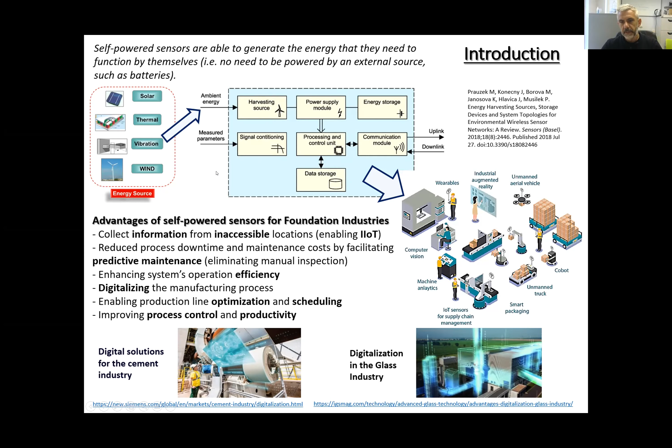Now, I mentioned the energy harvesting device here, which is a key part of this node, because it communicates with the environment to extract the useful amounts of energy that we want. I will concentrate, as I said, on vibration energy harvesting, where there are two main transduction concepts. One, the electromagnetic, where we have the motion of a magnet in the vicinity of a coil with hundreds of turns, and that changes the magnetic field of the coil, and that produces voltage at the end of the coil, which is the energy that we use to power sensors.

Where is the motion coming from? It's coming from the host system, the machinery, for example, that vibrates, and that sets the whole device into motion, and we can retrieve tens of milliwatts of power.

The piezoelectric concept, on the other hand, is less bulky, but it can retrieve smaller amounts of energy, hundreds of microwatts of power, and includes a beam with a tip at its end, which can be set into motion again by the vibration of the host. The beam is dressed with some piezoelectric material, which when it gets deformed, produces voltage that again gives us the useful power.

So both concepts depend on the external excitation, and the aim here is to make the magnetic mass, or this tip mass, operate at conditions of significant vibrations, at resonance conditions. Because the higher the velocity of those two masses, the higher the amount of energy that we can obtain. That can be seen here.

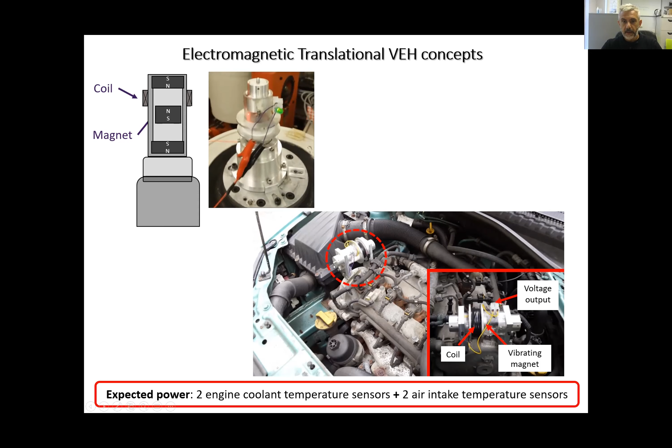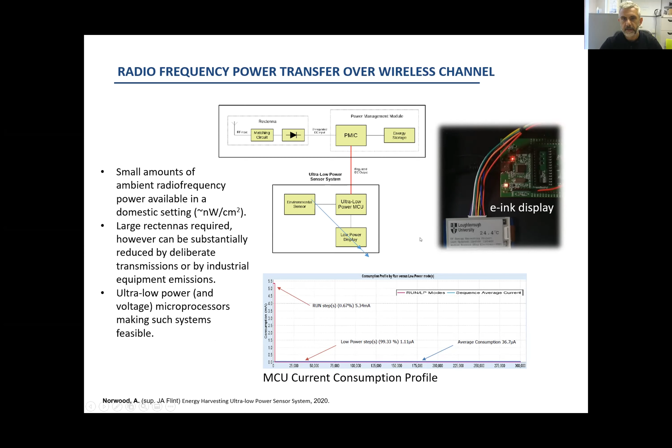Another way of harvesting energy is by using radio frequency power. Usually factories are noisy environments, and industrial processes create considerable radio frequency power that can be harvested using some rectenna—an antenna with a built-in rectifier. In this case, the harvested energy, reaching a peak at 5-point-something milliampere, with the help of a microcontroller, is fed into an e-ink display. So that's a different concept of harvesting energy.

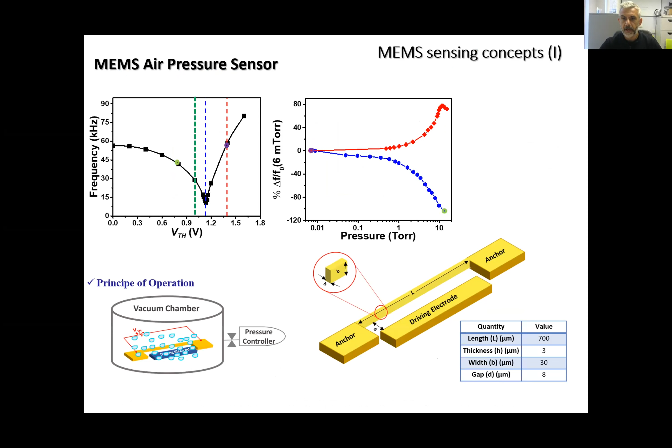In contrast to conventional sensors, which require special coating, MEMS have significantly lower size. Look at the dimensions in the bottom right, in micrometers, while conventional sensors cannot really go that low in terms of size.

The idea is to heat a micro bridge, that MEMS bridge, by establishing voltage between those two anchors, in order to bring this micro beam into buckling conditions so that its lateral stiffness is almost zero.

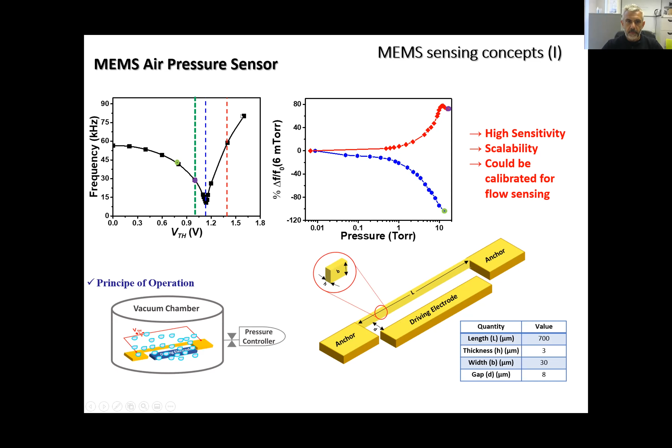You can see here in the frequency graph that the frequency decreases and reaches almost zero at the buckling point. When the air pressure increases, we have a frequency increase, and with appropriate tuning, this is how to determine the size of the pressure.

Finally, the same concept can be used for detecting gas concentration and the particular type of gas with respect to the thermal conductivity of the gas.

The resonator is exposed to gases with higher or lower thermal conductivity compared to nitrogen, and that, as a result, reduces or increases the axial stress in the microbridge, which alters the resonance frequency.

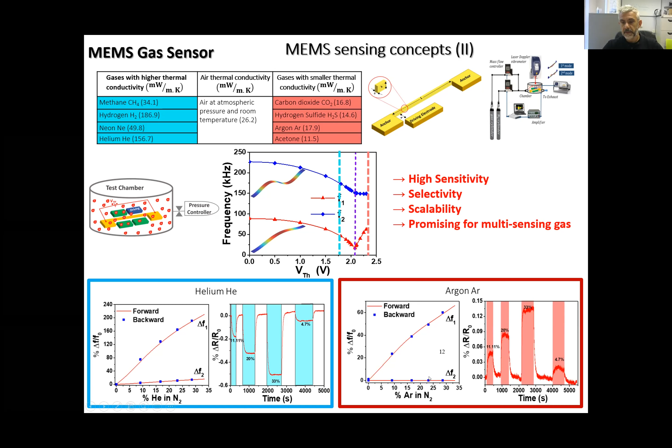I hope I described broadly the idea of how self-powered sensing systems can be designed for a variety of applications and for the foundation industry, where particularly input energy, motion, and vibration are available. Of course, these are bespoke systems, and their design depends on the requirements, the location, the machinery, and where industry needs to retrieve information from.

We will be very pleased to discuss any requirements. Thank you very much for your attention.

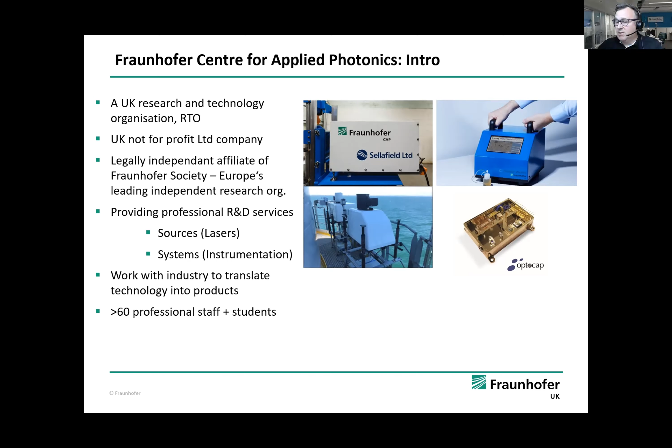So we work with and for industry. We have a mandate to help industry and help UK PLC move on with their technology.

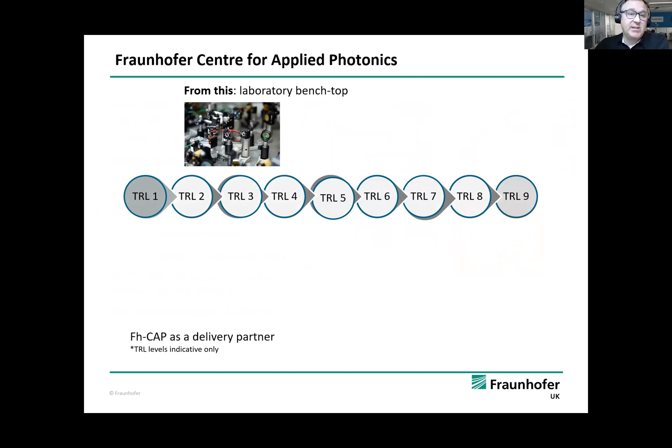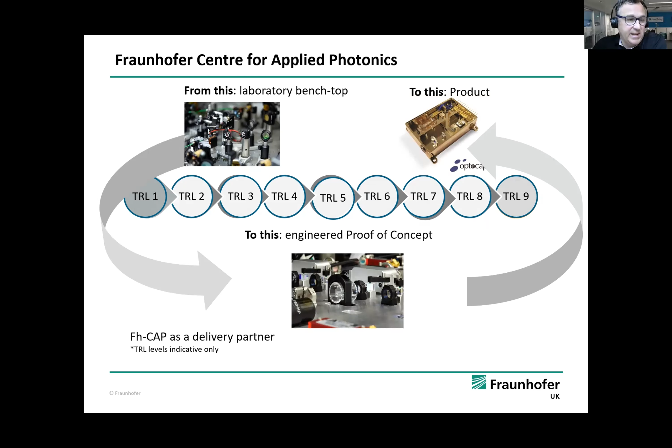If you're familiar with TRL levels, we can take things from laboratory benchtop setups, this classic optical table type thing, and engineer that up to a proof of concept, something that might be portable and manhandleable, and indeed all the way up to product technology with suitable partners. So we span the classic valley of death, as it's often called in terms of technology.

So our capabilities, as mentioned earlier, yes we design lasers, but more importantly, both systems and instrumentation for industry. So as a very brief intro, why photonics? Why might photonics be of use and benefit in some of these circumstances?

Well, it's the ability to sense something without touching it, without taking a sample, without taking it to a laboratory, without doing wet chemistry.

So if that sounds a little bit esoteric, well, if you have an iPhone or many other devices, then you will have a LiDAR scanner. And LiDAR is the optical equivalent, if you like, of radar. So this technology is out there and fairly ubiquitous, it's in your pockets.

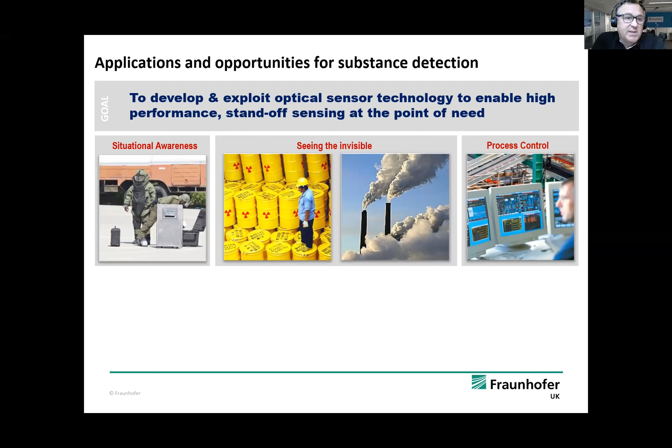So if I can just rattle through a few examples, most of our work, but some of our other people's work, is we have quite a bit of background in substance detection and things like situational awareness in homeland security, but also seeing the invisible, be it in the nuclear sector or industry, and a number of partners we've built up over the years that we've worked with.

That's very simplistic, but bear in mind there are other techniques we can use, fluorescence, Raman spectroscopy, and so on, but I don't have time to give a broad overview of all the different techniques. It's basically applying light to a substance and using the information to gain some insight.

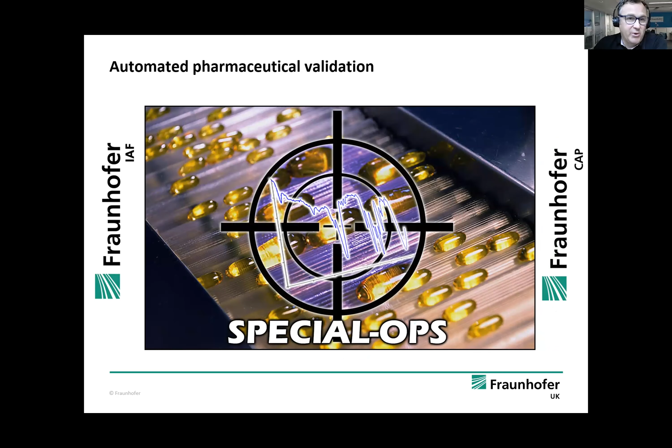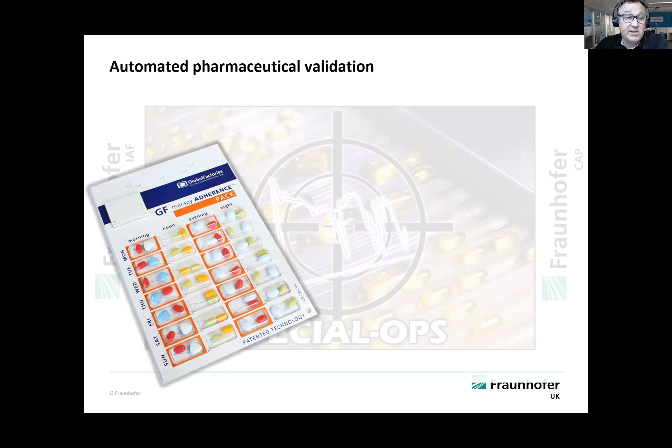So, for example, automated pharmaceutical validation is a project we carried out with one of our sister Fraunhofers in Germany. The idea here is to look at capsules or tablets and verify what they are. The motivation really comes from personalized medicine, where you have your own range of tablets for morning, noon, or night, and there's a demand to make sure you have the right tablets in the right packaging as they've been processed.

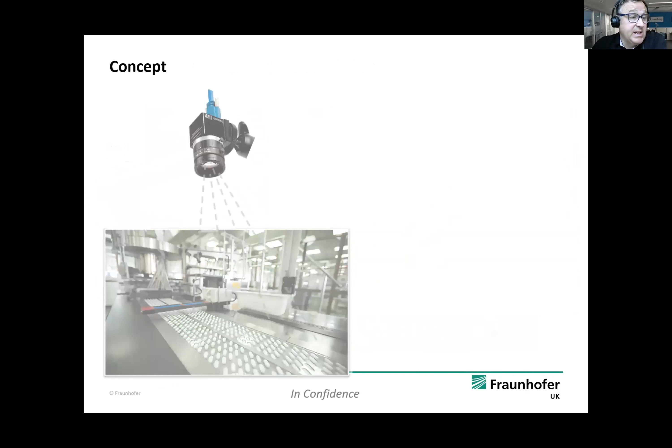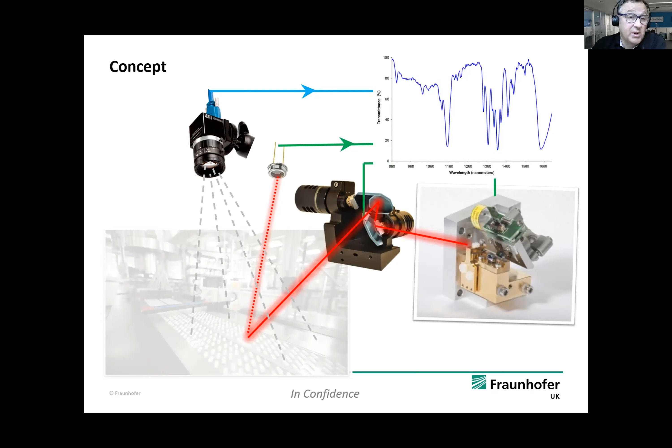So in a brief overview of the concept: you have a production line moving tablets, you have a camera system, and obviously you're going to need electronics to control this overall setup. Use the camera to detect the presence and location of the tablets, use that information to direct a laser at the individual tablets, and then detect the light that comes back. From that, you can ascertain the absorption spectrum and perhaps the actual type of tablet you've looked at.

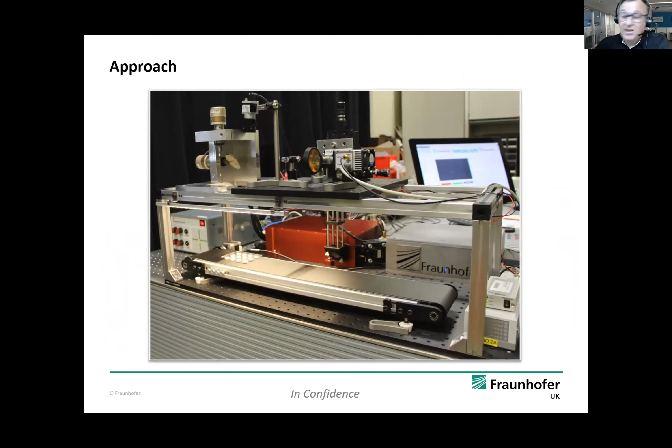So in practice, we put together our own miniature conveyor belt system, shown here with some benchtop systems. And if I can get this video to play.

So what we have is the blister packs with the lid off, sliding past. If you look, you might see a laser beam, there's actually a tracer beam here because this is the mid-infrared wavelength range. You can see a tracer beam directed at each individual tablet. Notice the pack is coming in different orientations, and we're able with the camera system to find where the tablets are. Then we can ask ourselves, what is this tablet? Is it ibuprofen, aspirin, paracetamol, or what have you? We can carry out that analysis and verify which tablet is which. So that gives you an idea.

So, perhaps process monitoring type applications. We're using similar technology in applications on granular material, actually in the nuclear industry for remediation of sites, to determine what is present in material that's presented to the system, perhaps on a conveyor belt. So that's the kind of work we have ongoing at the moment.

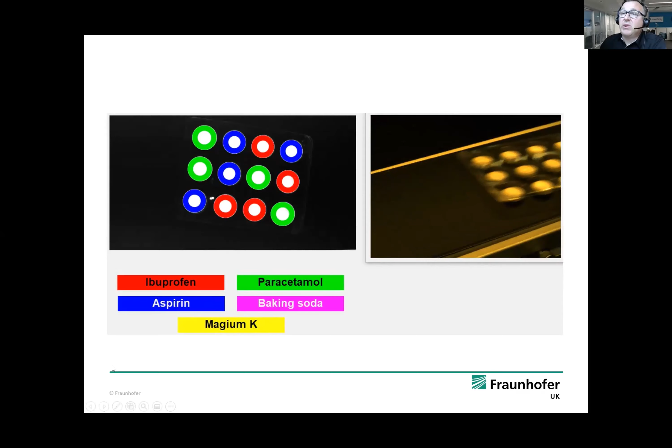I'll move on to another example of standoff sensing and detection using photonics, which is a European Union project, Horizon 2020, on the detection of explosives.

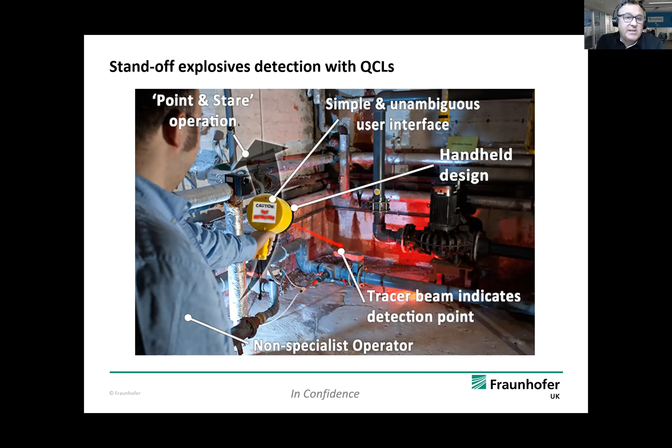Imagine you're a first responder to a suspected bomb factory, presented with lots of different white powders, and you want to know what is what without time to take it to a laboratory. This draws an analogy to standoff detection in process environments. We built a handheld device that you point at substances, and it gives a readout of what the substance is from a known library.

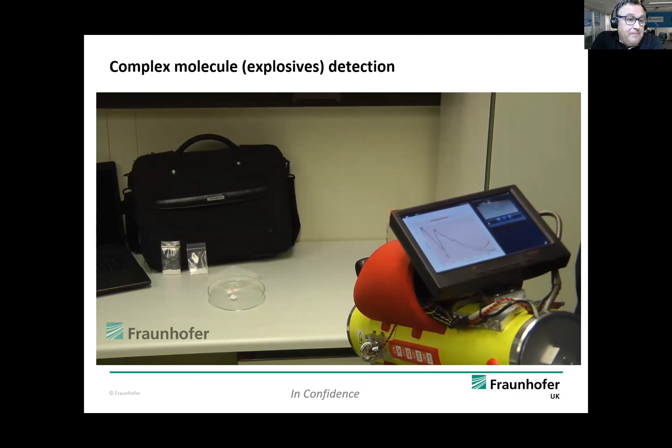This video shows one of our colleagues demonstrating it. You can see a tracer beam, the red beam, pointing at various substances, and on the panel mounted on top of the ray gun, every time it goes pink, it's a match with a spectrum from its library. It can detect things like residues on the little buttons on the bag there.

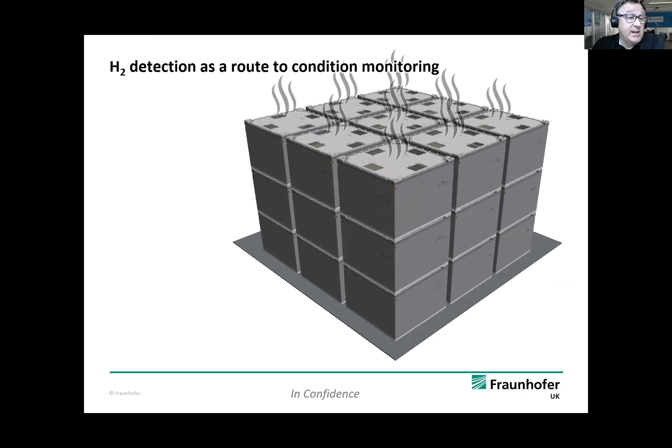Another example would be in the nuclear industry, detection of gases for condition monitoring. It turns out stored nuclear waste gives off hydrogen, and we want to monitor that hydrogen in a storage environment where cubes are stacked several high in a warehouse type environment, producing some kind of map of the hydrogen concentration across the storage area.

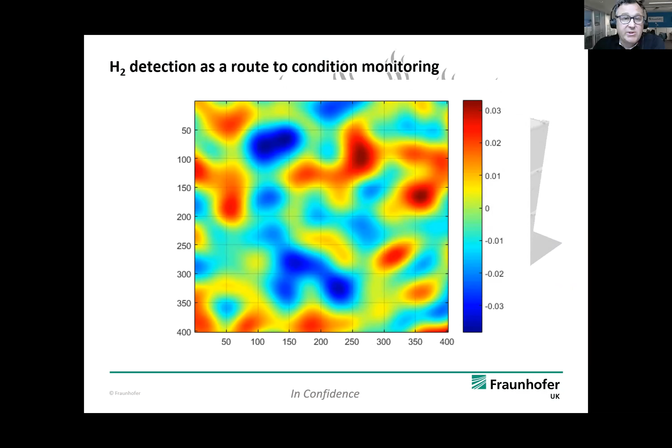We worked with Sellafield on developing and deploying this system. Basically, it uses time-correlated Raman detection. Raman is a technique where if you shine light at a given wavelength on a substance, it may give out scattered light at different wavelengths, different colors, and the shift in wavelength is indicative of the species of interest. So by examining the light you get back, you can gain insight into the type of material you're looking at, in this case a gas.

We have an instrument, we send photons out, we get photons back. From the photon arrival time we can ascertain the position. From the photon color or wavelength, the composition - is this hydrogen, nitrogen, water, benzene. And from the number of photons, we can ascertain the concentration. So it's a LiDAR type system. There's timing involved, and there's also very low photon counting, because if you send out large quantities of photons per pulse of light, you may only detect a single photon, or a few photons, coming back.

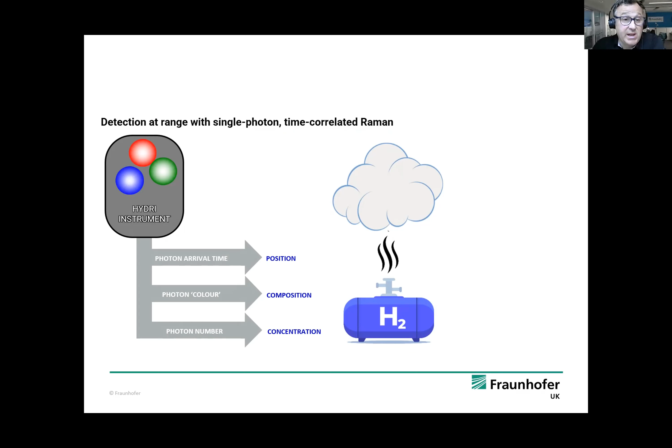In the quantum technology sphere, single photon avalanche diodes, SPADs, are coming to the fore and are available. These allow you to detect low numbers of photons, but also importantly give you timing capability, so you can carry out the timing and ranging technique as well. We've developed these systems and deployed them at Sellafield in order to carry out hydrogen measurements.

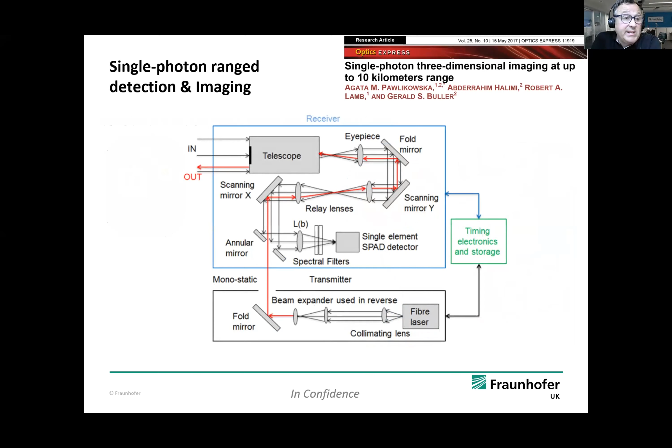A slight change of tack, but following the theme of single photon detection and ranging - this work was carried out by Gerald Buller's group at Heriot-Watt University, though we have experience working closely with SPAD detector companies. Essentially, they were using pulses of light and SPAD detectors to image, in this case, a clock tower at around 10-kilometer range.

The important thing to bear in mind is the power levels, the optical power levels being used. This wasn't, to use a very unscientific term, a death ray - it wasn't a really high power laser, this was very modest optical power enabling you to image at a distance.

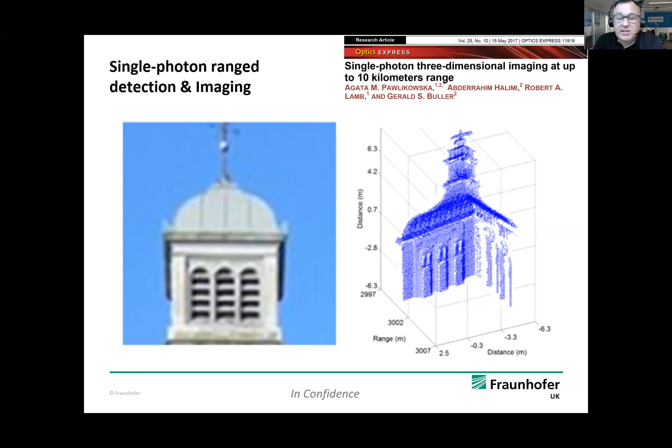That's another thing perhaps to bear in mind in industrial processes: the environment does not need to be pristine in order to use photonics.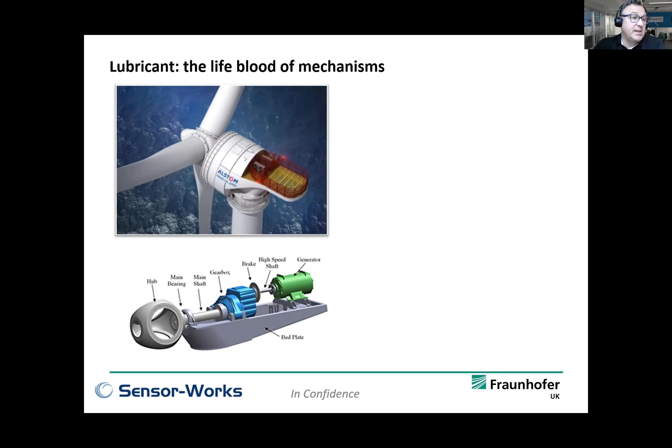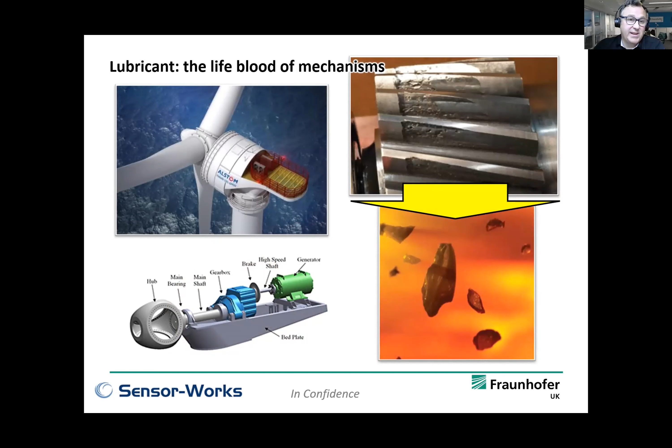And finally, lubricants. We've done some work on detection of particles in lubricant oil, obviously important in so many applications, wind turbines as an example. What you want to do here is detect the presence of the little shards of gearbox material that are going into the oil.

Without getting into details, this might be a technique where in the past you'd have to take a sample, take it to a laboratory and do the analysis, look at the particle counts, and gain some insight into the condition of the oil.

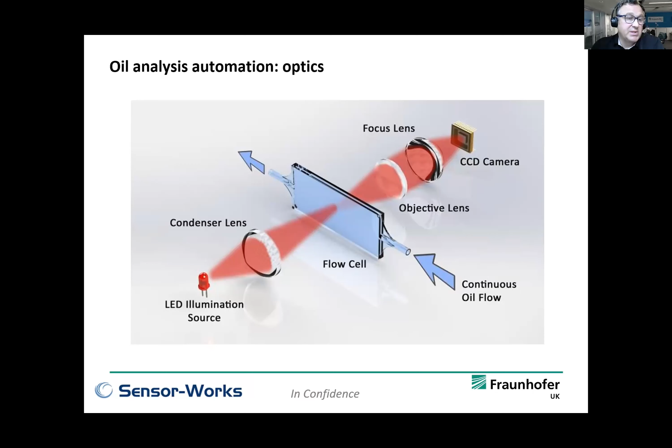What we did was we developed a system with a fairly simple LED source and a CCD camera. We flowed the oil through a flow cell and were able to histogram the aspect ratio of the particles we're detecting, the length, as shown here in this plot, and we developed a sort of standalone, fairly portable device for doing the oil analysis.

I think this is actually a picture of my hands in that photograph.

So hopefully I've answered the question, why photonics? As I said at the beginning, it's the ability to sense without touching. That could be material composition, granular material, solids, liquids, gases, the ability to see through clouds, see through media that would otherwise be difficult to see through, and the ability to analyze fluids.

Things I've not mentioned in detail would be hyperspectral or multispectral imaging in a more simple system. Structured light would be another thing of interest in some of these industries. Also Li-Fi, the optical equivalent of Wi-Fi, offering quite high bandwidth. And indeed, we're heavily involved in the quantum program in the UK, so quantum sensing, magnetic fields, for example, as part of seeing the invisible.

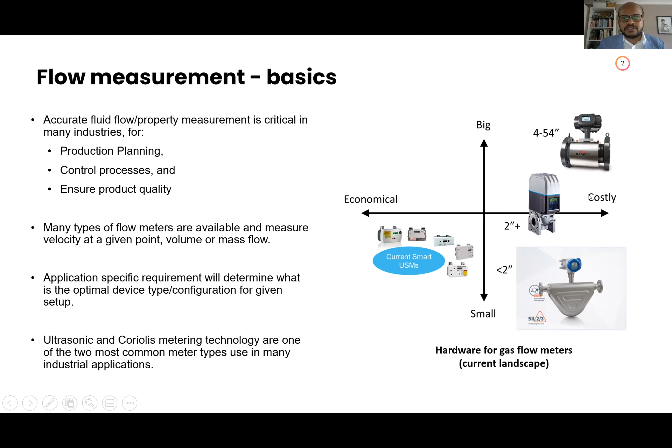Just a very short basics on ultrasonic flow meters. They're not new. They've been existing for many, many years, dating back to some early German patents in 1928. They've been in use for many years, with commercial use starting in the 1950s.

Today they are used in so many different applications, from small medical instruments to large industrial processes. Obviously, because of many advantages they bring, no moving parts, so many mechanical meters are getting replaced by ultrasonic meters because they are essentially very low maintenance, and they're also a metering type that works over a very broad range, from the lowest flow you can measure to the highest flow you can measure.

This is known as or referred to as turn down ratio. It's a very wide turn down ratio compared to mechanical meters. For example, turbine meters typically have a 10:1 turn down ratio. Compared to that, an ultrasonic meter goes several hundred to 1. So instead of having a bank of many turbine meters, you could potentially have one meter doing the measurement.

They're also fast and bidirectional. So if there are layouts you need to change to be able to replace 2 pipelines carrying stuff into maybe one that can switch directions to reduce capital or simplify some processes, ultrasonic again can be quite handy there, because you don't need 2 meters to measure in 2 directions.

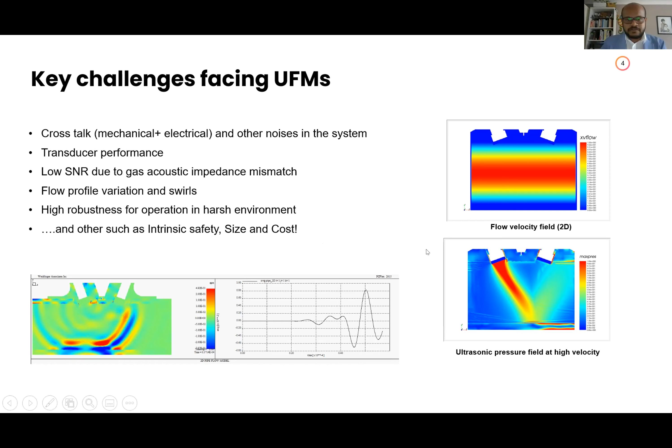I talked about flow profile variations, so again, in a pipeline, where you install everything matters, as does the effect of harsh environment - temperature, pressure, etc. Another challenge is that most industrial ultrasonic meters serving areas like oil and gas are proven technology, but are often restricted by size and cost from wider adoption for multi-point measurements and other areas where equipment cost has to be very low. So a low cost, efficient device with applications in many different areas could be the way ultrasonic flow meters need to move.

With that very rapid introduction to ultrasonic technology for flow or fluid property measurement, I'll introduce HIMET. As mentioned earlier, HIMET is a very new startup. We're based within the Warwick Manufacturing Group, University of Warwick Incubator, and we are basically an instrumentation company.

It's founded by 4 partners. Along with me, we have James looking after business development, Andy leading technology development, and Chelsea as our chief financial officer. We are essentially building this company to start making, designing, and fabricating new instruments that help many industries move towards sustainable energy into the future.

We picked hydrogen as a topic to concentrate on because we firmly believe there's no silver bullet, and the future energy system and future processes within industries are going to be quite complex and hybrid. There'll be a lot of challenges, both technical and economic.

We feel that hydrogen has a pivotal role to play in this for all the good reasons. The refinery industries and heavy industries already use hydrogen quite a lot, so the technology and means to handle and produce them already exist, even though the hydrogen produced nowadays isn't from a green source. That's something which, with sufficient investment and support, can be moved towards a greener alternative.

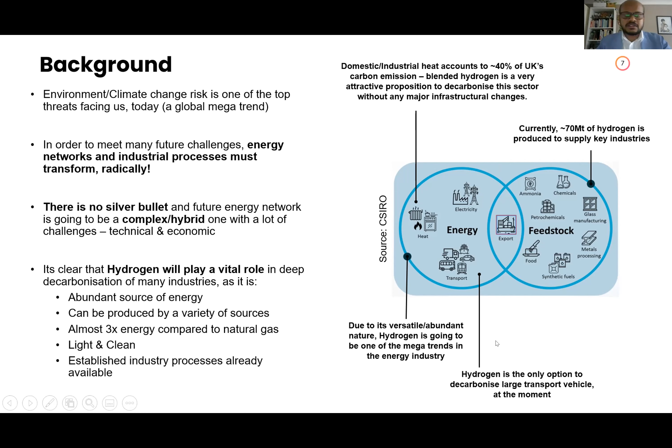So, I talked briefly about hydrogen again, very high level, but in order to transition into hydrogen, there are so many challenges, technical and economic, and these hurdles are at every step from production of hydrogen, storage, distribution, and use, and of course safety concerns as well. Even though hydrogen is in the same range as natural gas, which we've been using for a couple of 100 years now in the UK, it is somehow perceived as a more dangerous gas. So there's a lot of things that need to fall in place for this industry to pick up.

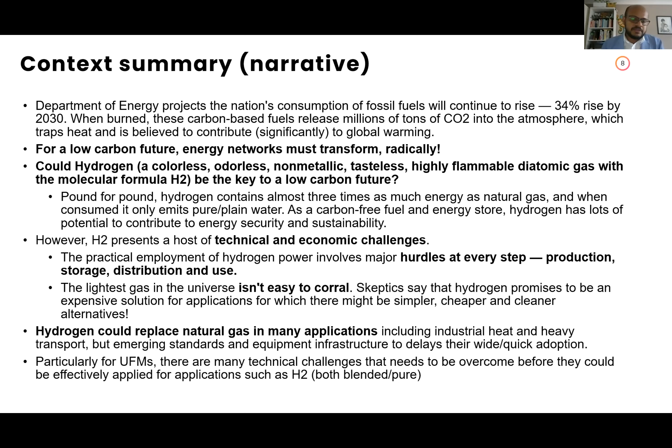From an instrumentation point, also, this is a very tricky gas. So simply adapting or tweaking some existing instruments that are built for other gases might not be optimum, and there's a need for developing bespoke instruments. So with that kind of background, I'll give a very high level overview of the products that we are working on.

We are basically building a measurement platform. We bucket our product development into three compartments. One is hardware. So over literally the last 8 months, we've taken a step back and asked, what do we really need to build as hardware if you're building for unconventional gases like hydrogen, and also adjacent industries like carbon capture and others, where you'll have a requirement to suddenly start metering, heavy industries capturing their carbon, and that needs to be metered in order for carbon tax, etc.

So what we are heavily focusing on is building advanced new hardware, putting our 35 plus years experience in sensor design to really build bespoke hardware for measuring unconventional gases in different settings, and then the algorithms or the software needed to get the best out of this hardware. They are closely connected to the hardware. Those are the two areas we are heavily investing in at an IP level, having proof of concept prototypes developed, etc. And we are really leveraging all the fantastic technology advancements happening in adjacent areas such as IoT and communications by adapting electronics and analytics platforms to position our products.

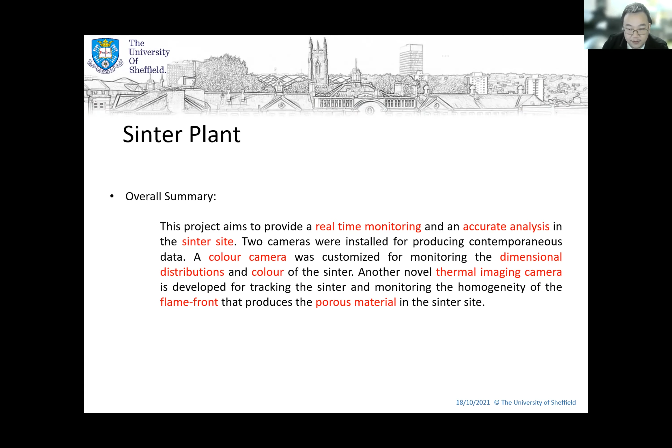Our live video, along with analysis data, is shown on a web page. By helping with this technology, the industry could monitor the process in the sinter site in real time and optimize their procedures. Here is the design of the sinter camera. It contains a color camera itself with a designed lens, a powerful PC, and a customized air purge for removing the dust. This instrument has been installed at the top of the conveyor and supplies a live video while this conveyor works.

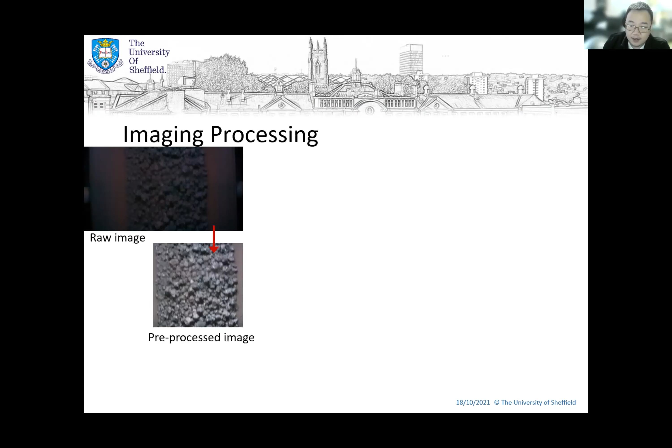I would like to show the image processing we designed for monitoring the sinter site. First, we pre-process the raw imaging by choosing the conveyor edge and normalizing the illumination. Then we mark the foreground and background by a series of image processing, and use the watershed algorithm to detect the rock.

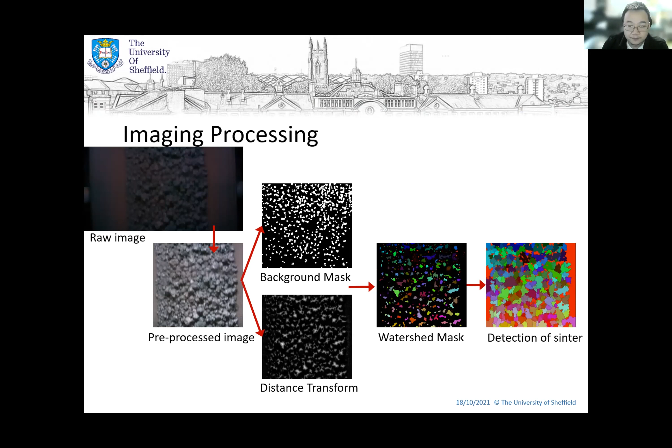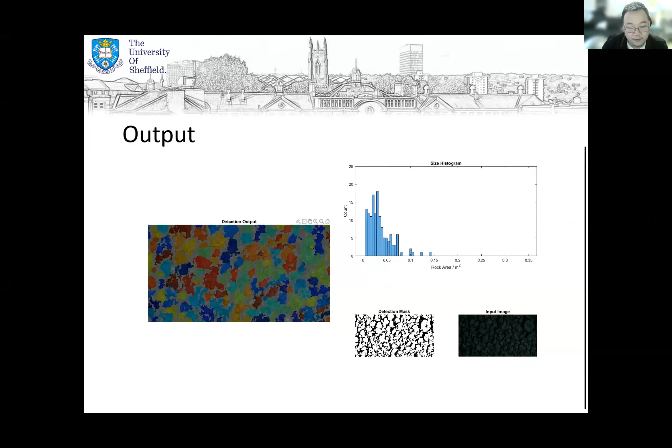This is our second camera in the sinter plant. The designed thermal camera we used here is for monitoring the temperature distribution and the burning front in the sinter conveyor by its thermal intensity. Besides, we designed an air system which could supply positive pressure in front of the window and keep the room clean all the time for observation.

This instrument has been installed in front of the conveyor to monitor this procedure 24 hours. This is our image processing program. Firstly, we correct the effect of the dust. As we know, these are really dusty conditions, so for each image, we correct the intensity for the dust.

Then we track the top edge of each pellet, tracking the conveyor speed. This is used to estimate the pellet speed and detect if the pellet has already dropped, marking the timing of it. Then we're tracking the bottom edge.

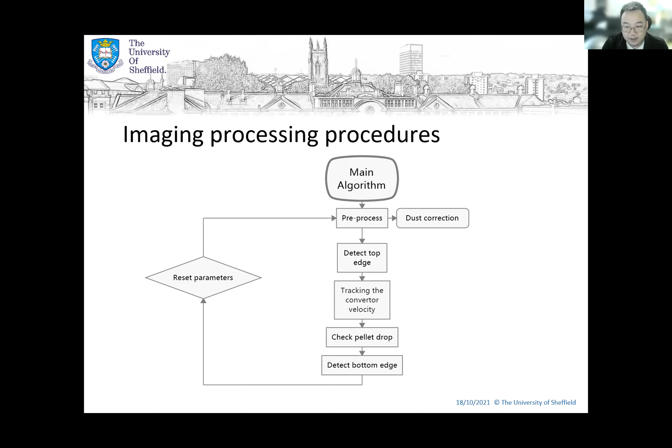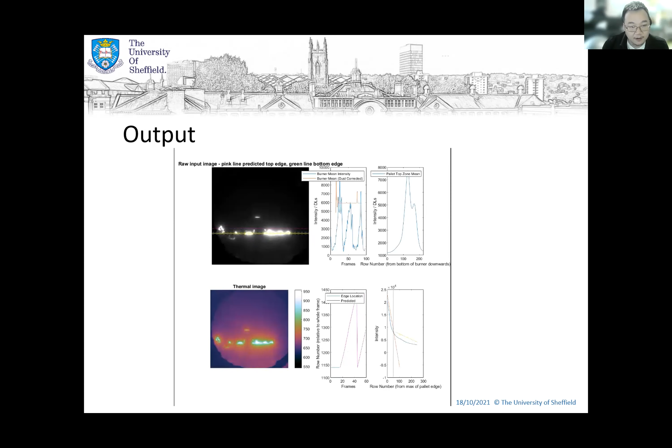The second project we are working on is for the blast furnace plants. Inside the blast furnace, we monitor the conversion to liquid iron by means of a novel thermal image camera. We aim to use our technique to monitor the reactions inside the blast furnace by temperature and other analysis, and help the industry adjust the oxidizer and fuel.

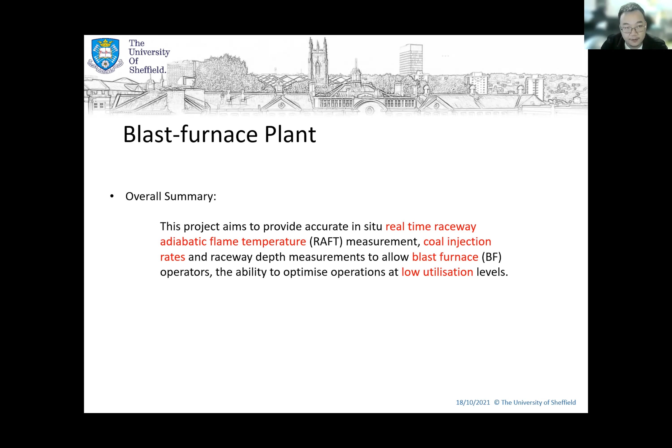For the long term, we plan to install 30 thermal cameras around tuyere locations to monitor the process from different angles of view. This is radiance calibration based on Planck's law that we made in the lab. We have done several calibrations using different exposure times in order to fit various flame temperature situations.

Here is the video showing outputs of this project. Because this camera was installed at tuyere locations and looks inside the furnace, we can clearly see the injection lance and the coal coming out of it. We also highlight the highest temperature zone, which indicates the raceway, in the raw video here.

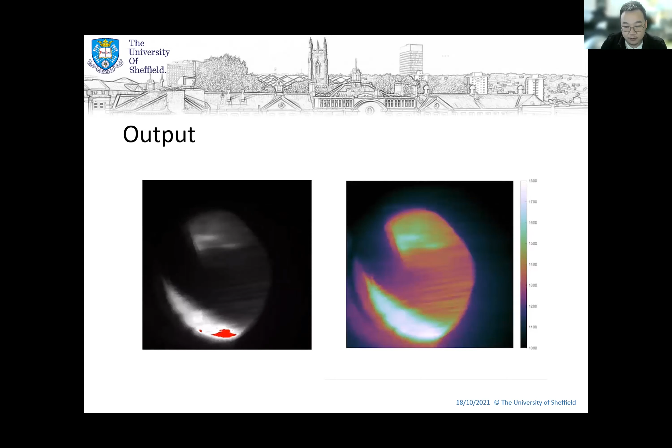On the right video, the flame shows the flame temperature distribution based on our calibration process.

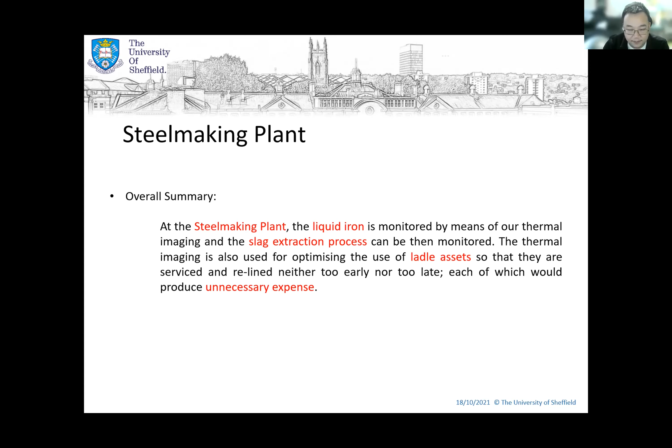The last project I would like to introduce is at the steel making plants. We install a thermal camera to monitor the liquid iron and also the slag extraction process. This thermal imaging was also used for the ladle assets, to help the industry evaluate its service status and the timing for reline. This is quite important because the right timing of the reline can significantly save unnecessary expense.

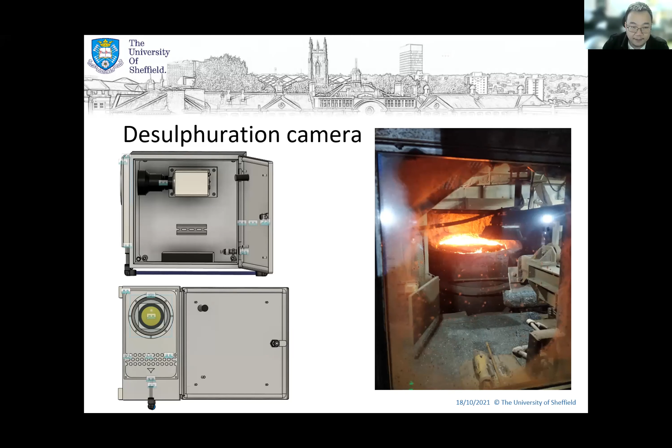Here is our instrument already installed at the desulfurization site. The picture on the right shows the slag extraction process. Considering the surrounding temperature is quite high and there is strong radiation emitted from the hot iron, we also designed a heat protection part, which includes the heat shield, instrument blankets, and temperature loggers. We have calibrated the thermal camera and made it suitable for the appropriate temperature range.

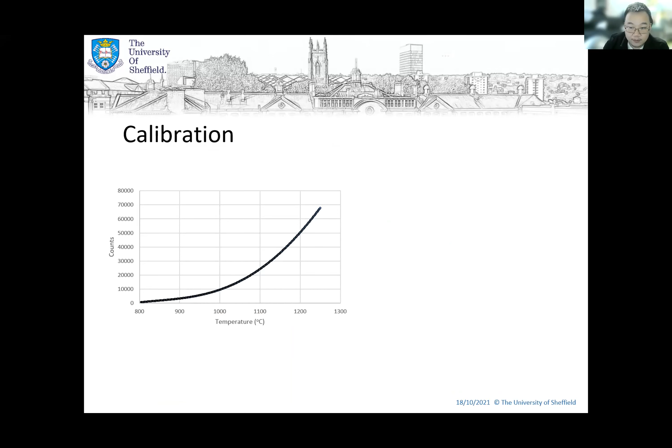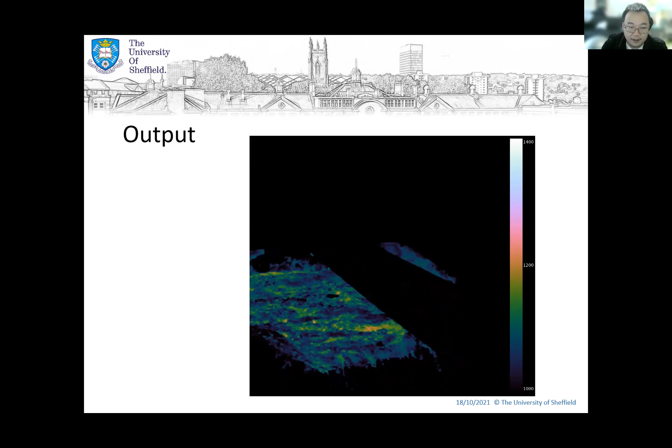The ladle that's used to transfer the liquid iron needs to be cooled down and assessed before use every time. Our thermal camera captures the images while the ladle is under cooling, and we select several regions of interest to represent the different materials for the emissivity estimation.

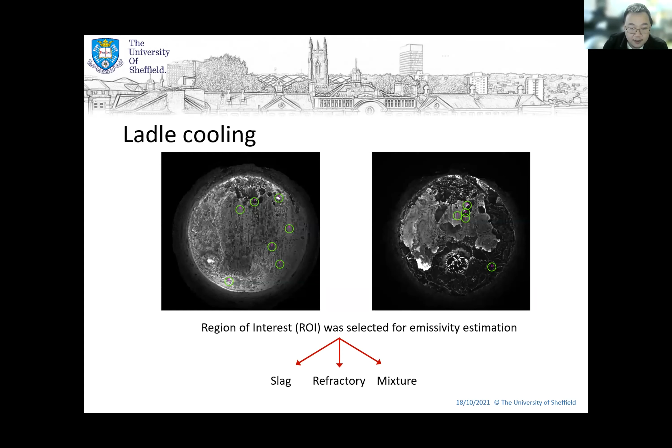After the calibration, we also analyze the measured temperature residuals, which is caused by the different emissivity estimation.

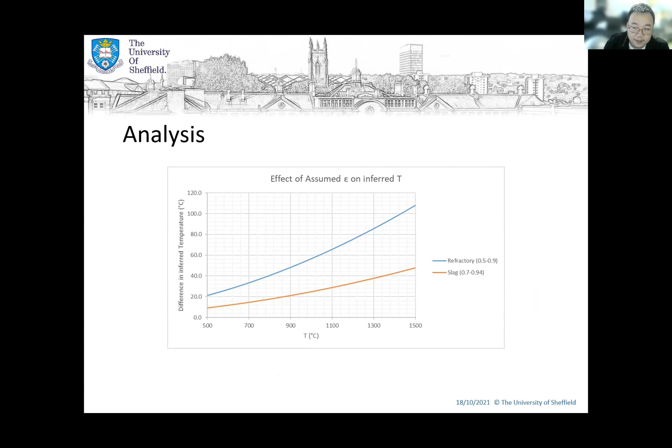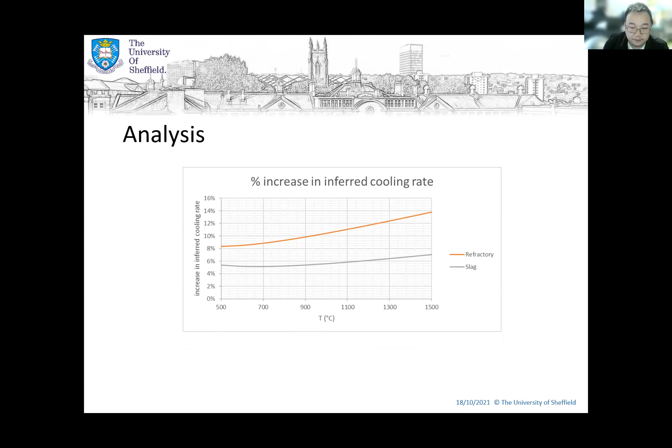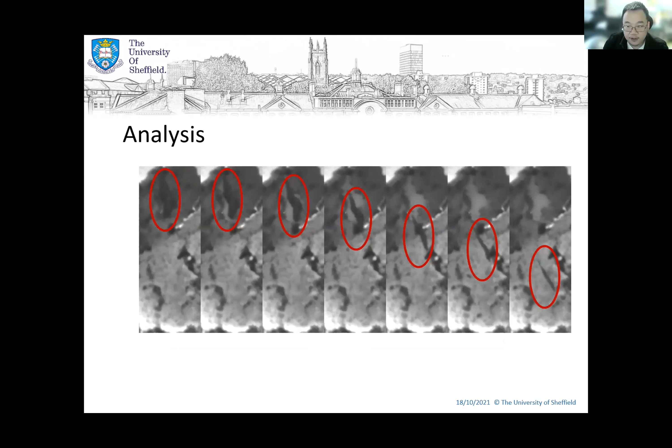Besides this, we analyze and see the slag dropping process phenomenon during this cooling process, which is shown in the red circles. We have found there was a temperature change before and after the slag drop. From our statistic results, the industry could better control their process.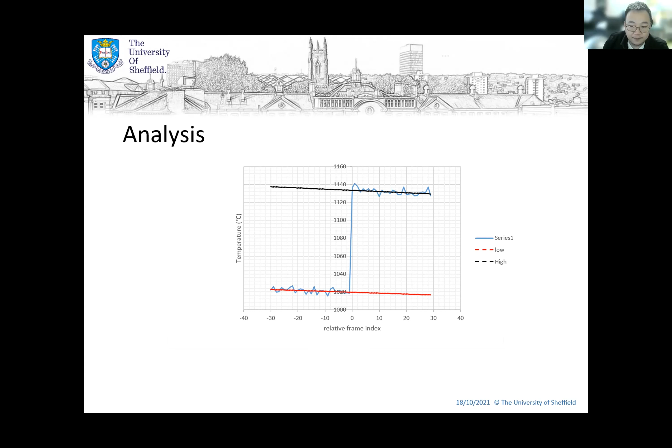At the end, I would like to show an example video we captured while the ladle is under cooling. Thank you very much for your time, and I'm happy to discuss if you have any questions.

Thank you, Yufeng, that was really interesting. I am familiar with some of John's work, and now I'm familiar with your work as well. So, are there any questions for Yufeng? If you can post them in the chat, that'd be great.

In the meantime, you've been mainly focusing on the steel industry. Are there any other industries which you feel that some of your thermal imaging cameras and your digitization is going to be important in the future?

Yeah, because especially for the steel making, this process has a very high requirement for temperature monitoring. So by using our techniques, we can help to control these, monitor these, and help the industry adjust their strategies, just like in blast furnaces. Inside, the industry doesn't know what happened, but from our cameras we can see if the oxidizer or the coke has a balance, so they can adjust their strategy from this.

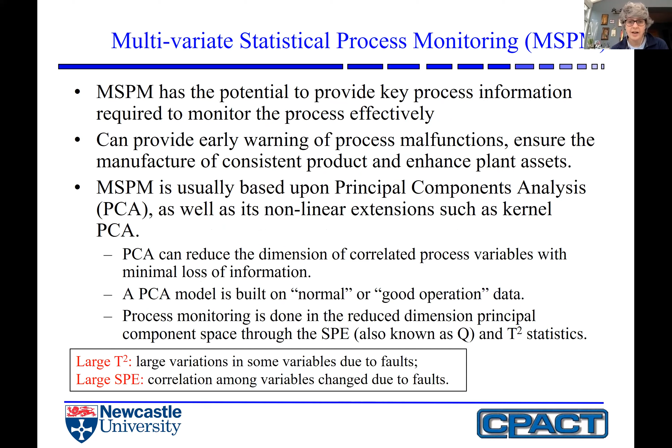Multivariate statistical process monitoring can very effectively be used to monitor a wide range of processes. It can give you early warning of process malfunctions. It can ensure consistent production of a particular product, so you have less waste and can produce more of what you want more often. You can have improved usage of plant assets as well.

Traditionally, multivariate statistical process monitoring has been based on principal component analysis, and then it's been extended to nonlinear versions. Traditionally it was more commonly used with stationary processes, but again it's been extended to non-stationary processes. In its simplest form, we're basically using the correlations between different variables to produce new variables, so-called principal components. This reduces the dimensionality of our problem, so we can go from hundreds or sometimes thousands of variables down to just a few principal components.

We build a principal component analysis model using data collected from a process functioning under normal operating conditions, and then we project new data into this model. So the monitoring is done within principal component space. We commonly use two statistics to detect faults: the squared prediction error, or Q statistic, and also Hotelling's T-squared statistic. We can use these to identify a fault, and then diagnose what the cause of that fault actually is.

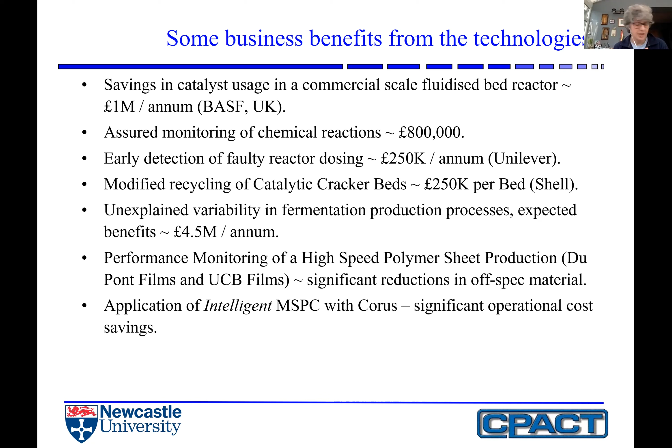So hopefully that gives you a flavor of the range of industries. Now I'd like to invite Jay to talk specifically about how these methodologies have been used for coke oven monitoring.

Okay, thank you, Alison. So now I will talk about using MSPC for coke oven monitoring. Coke is an important material in the iron and steel industry, and we use coke in blast furnaces for iron making. Coke is produced from coal in this coke oven. We charge coal into the coke oven, and the coal is carbonized in the oven for about 18 hours, then pushed out from the oven and quenched.

The heated oven transfers heat from the burning chamber to the coal chamber. We typically have multiple ovens arranged in a battery, one oven next to another, for energy efficiency. The off gas, which is the raw coke oven gas, is sent to a byproduct plant where it's cleaned, and the cleaned coke oven gas is used as fuel in the coke oven.

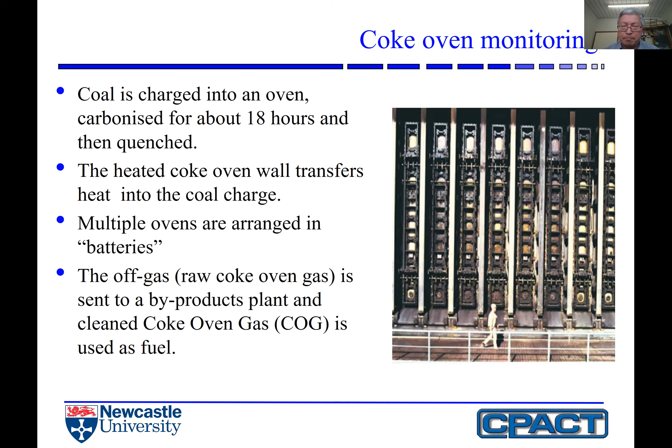This picture shows a coke oven from Tata Steel at Scunthorpe. Here we have 3 batteries, with 25 ovens in each battery, so altogether there are 75 ovens operating. The coking time is about 18 hours, which means every day 98 ovens are being pushed. The production capacity is around 690 kiloton coke per year.

So one problem with coke ovens is through-wall leakage. Basically, the oven wall can sometimes have a crack, so you get leakage between the burning chamber and the coal chamber. Some of the material from the coal chamber can transfer into the burning chamber, which will increase emissions and cause incomplete combustion in the burning chamber, and therefore increase energy consumption. So it's important to detect this leakage as quickly as possible.

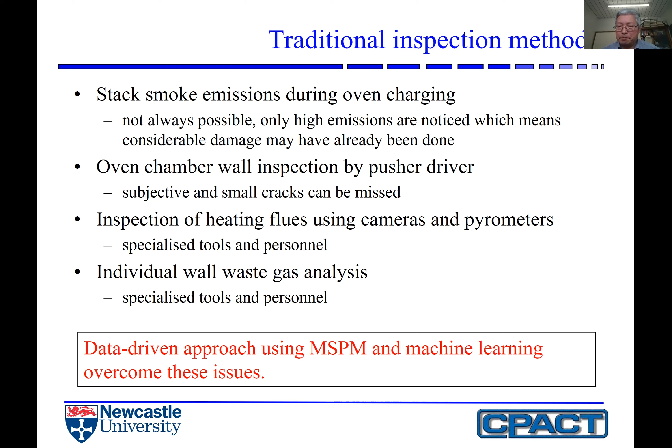So we have many months of process operational data from Tata Steel. Those are continuous data and discrete data during each oven pushing out. So it's a big data problem. We have quite a lot of data, and mixed types of data. As Alison mentioned, data pre-screening is very important, because this oven operates in a very harsh environment with high temperature, so some sensors will fail during operation. We need to detect any missing data and outliers in the data.

So finally, after data pre-screening, we selected 21 process variables used for this MSPM, and we also downsample the data. In the plant, they log the data every 5 seconds, so we downsample to 1 minute.

Coke oven wall leakage is typically indicated by high stack CO and high stack dust emission. So here we use the stack emission data to divide the data into normal data and abnormal data, and we build a PCA model on this normal data. We use a PCA model to reduce the dimension of the variables, reducing it from 21 to 4 principal components.

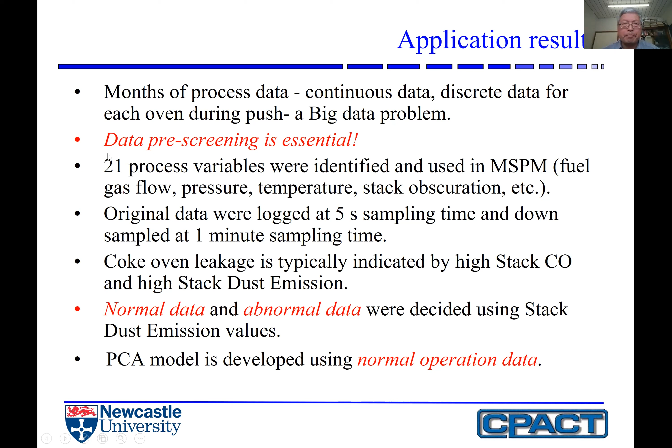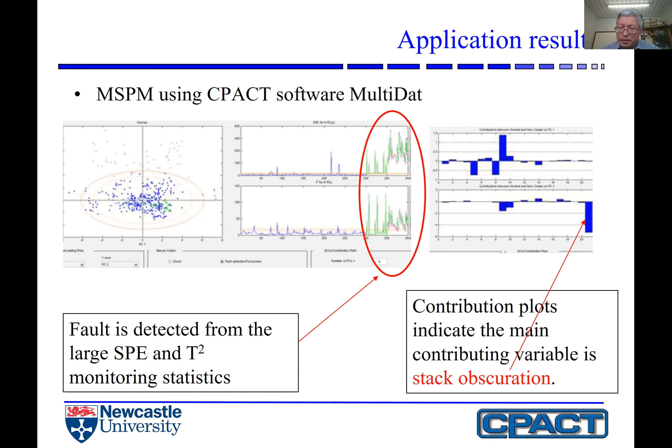Basically this stack obscuration measures how clear you can see through the flue gas. That indicates probably there's a high emission in the data, and it's likely you've got oven wall leakage. But as I said earlier, we have 75 ovens, so which oven has this leakage? Now we need to look at some other data.

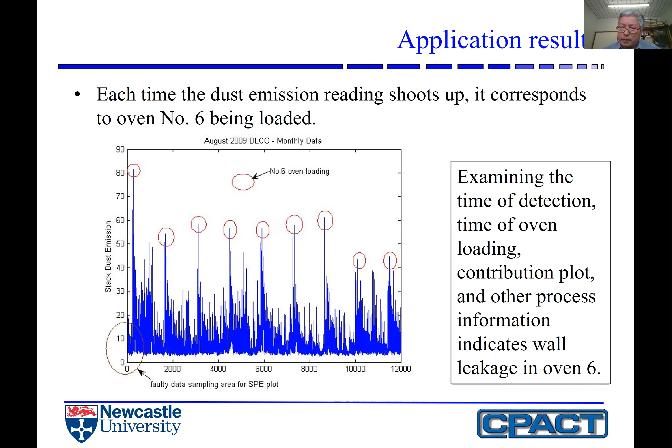Okay, so here we look at the data around this time - this circle represents what was shown in the previous slides. So we analyze this part of the data, and also look at the stack dust emission data, and we notice that each time oven number 6 is being loaded, there is a sharp shoot in this dust emission value. By examining the time of detection using this principal component model, the time of the oven loading, the contribution plot, and other process information, we can conclude this oven 6 has a leakage problem. So the process engineers can try to repair this leak.

Apart from principal component analysis, we can also use some other advanced machine learning techniques. One of these is called slow feature analysis, introduced back in 2002 - so it's a relatively new machine learning technique. One of my collaborating research groups at Tsinghua University in China applies this technique for process monitoring, and here in Newcastle, my PhD student and I propose integrating slow feature analysis with neural networks for soft sensor development.

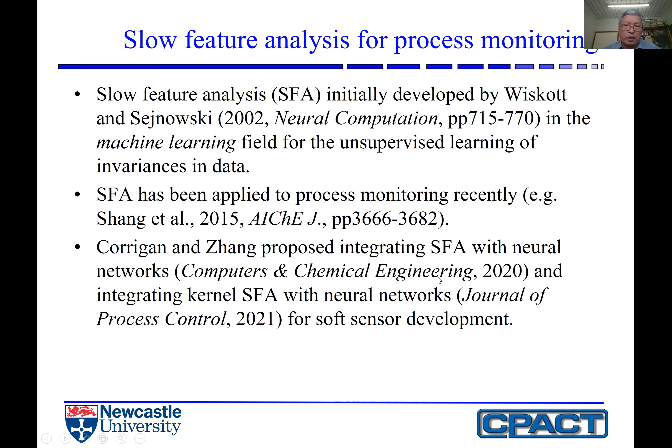This slide shows the idea of slow feature analysis. Here we have 4 variables - you can see the driving forces are sine t and cosine 5t, and the rest are noise. By using slow feature analysis, we can discover slow feature 1 is sine t, and slow feature 2 is cosine 5t, and the rest are noise.

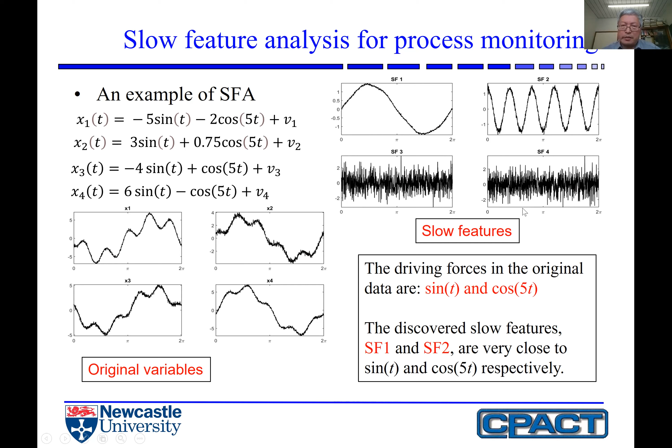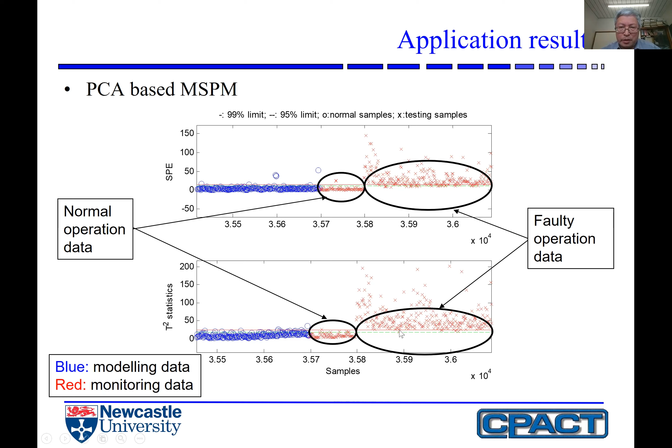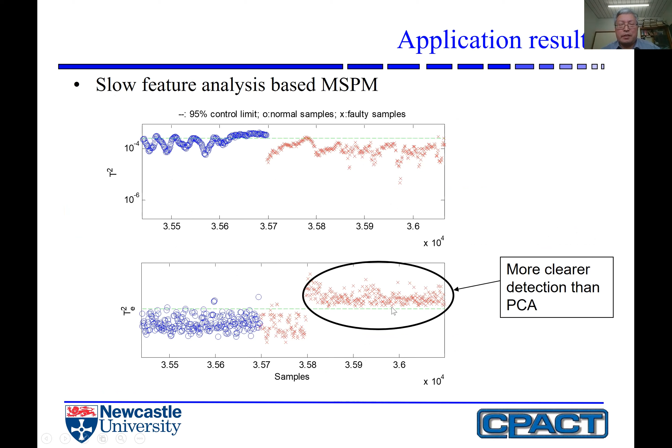We apply this to the monitoring of the coke oven, comparing with PCA based monitoring. This shows a PCA based monitoring - the blue points represent modeling data, used to build a model, and the red ones are monitoring data. The initial red points are normal during normal operation - you can see they are below the control limits, and when there is a fault, the T-square and SPE are exceeding their control limits. But some points are quite close to the limits, and some are below. By using slow feature analysis, we have a much clearer detection - all samples are above the control limits, meaning we can detect the problem with much higher confidence.

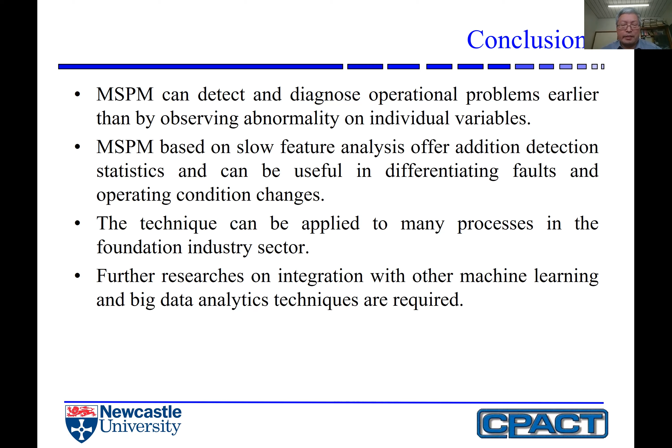So finally, to conclude - from this example, we can see that multivariate statistical process monitoring can detect and diagnose operation problems earlier than observing individual variables. Also, with slow feature analysis, we can detect the problem more clearly and earlier. This technique can also be applied to many other foundation industry sectors, and we need further research on integration with other machine learning and big data analytic techniques. Thank you for your attention.